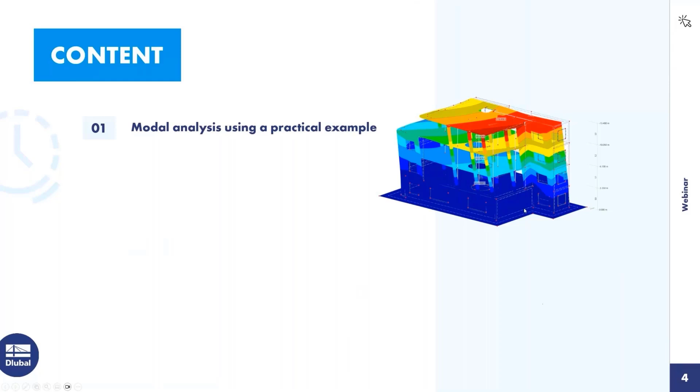To the agenda today. Thomas will at first do a modal analysis on that example here on the right side. In the next step, he will do a seismic design. He will use the results for the design of structural components. And he will also use the add-on Building Model to display story drift, masses per story, and forces in shear walls.

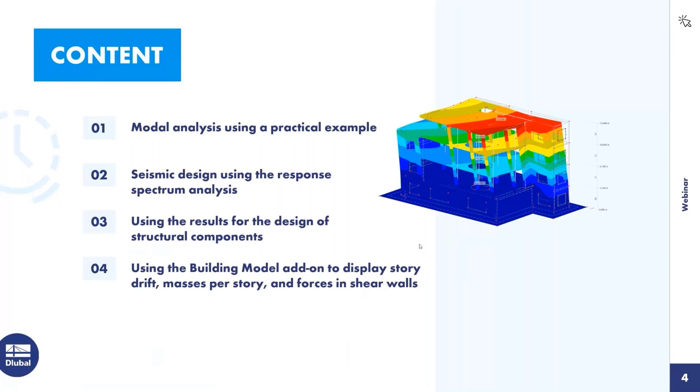And now we can just start with the program RFEM 6. I'm going to guide you through the seismic design according to Eurocode 8. You can see the already modeled building right here, as well as its loading. For the seismic design in general, the most practical approach would be to carry out the ultimate limit state without the consideration of earthquake forces first, like we imagine we've done this already for this building. That means we have our model completed already, and we also have our loadings on that system. That helps a lot since the response spectrum analysis and the used modal analysis both depend on masses, and those masses are dependent on all the structure and all the surface loads, or in general all the loads in the system.

The other alternative, which is also doable with RFEM 6, but I think not that often used, and you could bring more mistakes into the game, is if you just take the earthquake design with you from the beginning. So you would create your modal analysis from the start and pick a load case and so on. But that means you would have to reopen those dialogs more often. Faster would be to first model the structure and load the structure, and then start with the earthquake design. And that's what we're going to do here.

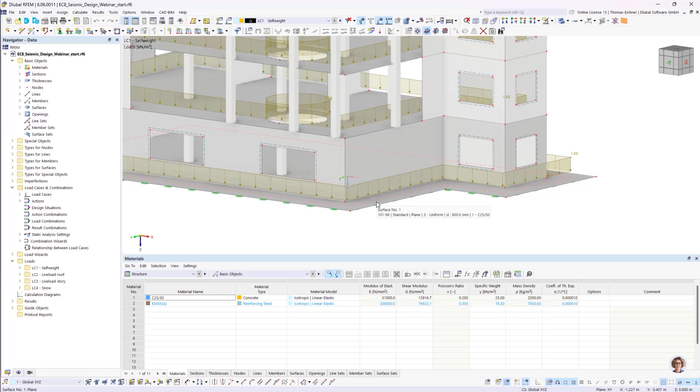We have our building already. We have a reinforced concrete 4-story building for industrial uses. We can see several walls which are always kind of needed for earthquake forces, at least for higher ones. They always help. We have some columns and we have slabs on each level. Let's go into one slab, for example, where I have a thickness of 24 centimeters. Also, we have a C25/30 for all parts of the system. We also have a ground plate right here of 80 centimeters. And this ground plate is also completely supported. That's going to be an important part later on.

So let's go over the loadings next. We do have the self-weight with additional self-weight defined. You can see the additional self-weight right here with 1.0 kilonewton per square meter on the roof floor and 1.5 on each other floor. The loads on the base plate are just simplified, the same as on each normal level. Also in the self-weight, we have the structural self-weight included, which can be activated in the load case. So that's about our permanent loads.

Then we can go to our live load at the roof. There we have 4 kilonewtons per square meter on the top level. And we have our category A for the German Eurocode with 2 kilonewtons per square meter on the other floors. And last but not least, we also have some snow loads, almost negligible, but we have them also included with 0.81 kilonewtons per square meter.

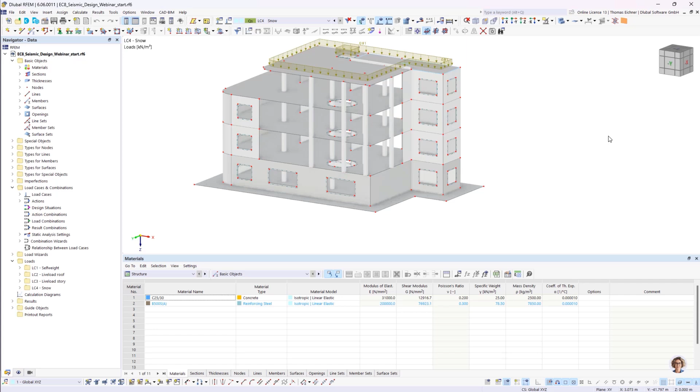We didn't define any wind loads since today we will only investigate horizontal excitation due to earthquake and the seismic design. So now that we went through all our loading and all our system, we can go on and start the dynamic analysis.

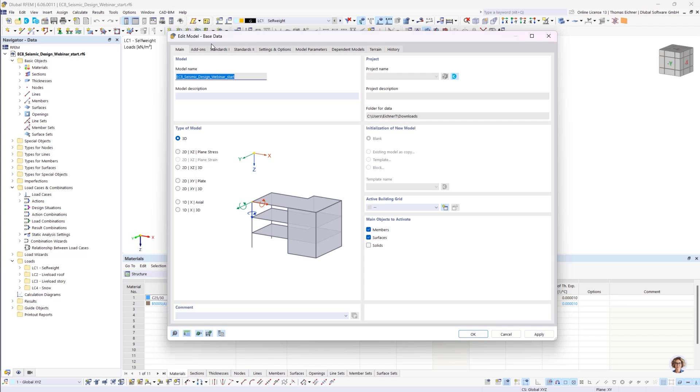Therefore, we need to know RFEM 6. It has a base program where you can model your structure and apply the loading. Then we have several add-ons for those special analyses. And then we're gonna go here in this base data. This always also appears if you create a new model. So in this base data, we can go for the add-ons.

And just as a hint, for me, it's best when I'm doing an earthquake design, I would just activate here our modal analysis, our response spectrum analysis, our building model, and the corresponding design add-on, in this case, the concrete add-on. For our step-by-step show today, we will also apply those add-ons step by step.

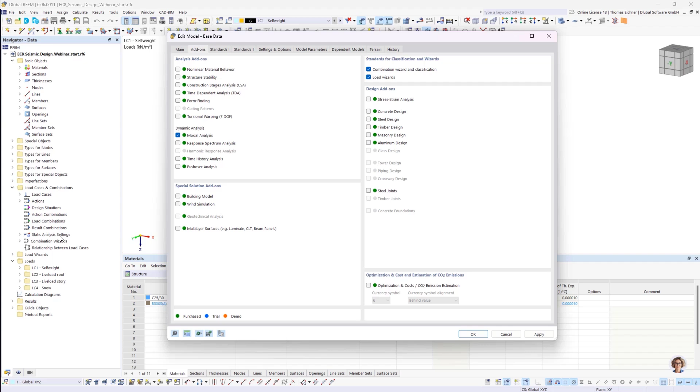So let's start with the modal analysis. And one special thing about the modal analysis is that it's standard independent. Means we don't have to care about our standard here for the modal analysis itself. So we can just apply the modal analysis, and then we will see on this left-hand side that there is gonna be something added. We press OK, and there it is, the modal analysis settings. So we activated that add-on, and all the settings were included in our RFEM graphical user interface.

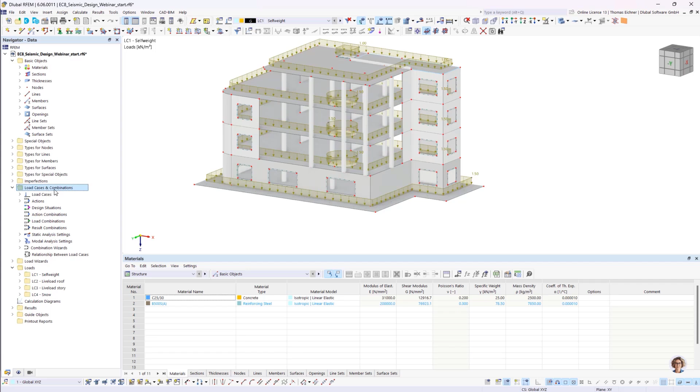And with this, these modal analysis settings are under load cases and combinations. Means I can go in here for the load cases and there we can initialize our modal analysis. Means creating a new load case of type modal analysis and then looking through all the options here.

So let's start right away with our import masses only from load case or load combination. So within dynamic analysis, we also have the mass matrix in our system, in our calculation. Means we need to know what masses will appear in this mass matrix. And for the base knowledge of this matrix, we need to know a load case or a load combination, which we define here. And all the stuff inside this load case or load combination is then used for the masses in the modal analysis.

We're gonna go for the combination while doing the response spectrum analysis in quite a bit. But right now I just want to go for the standard modal analysis. So here another thing, we can go into this modal analysis settings and there are some further options. First, let's go on the eigenvalue method and how many eigenvalues should be calculated. Here we can define either the user-defined method, so we just prescribe the number of modes that need to be calculated, or we have more automatic approaches here.

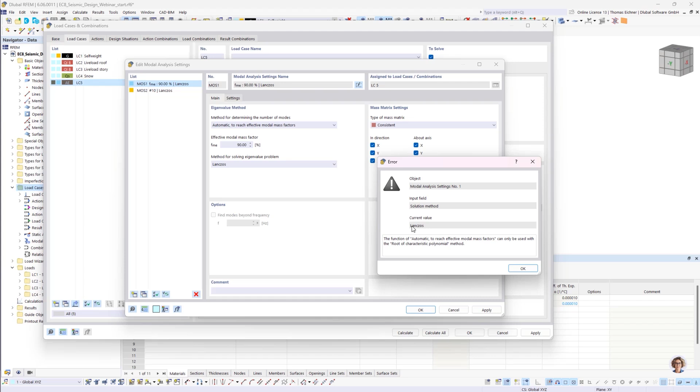This is freshly new. For example, this automatic to reach the effective modal mass factors. And with this option, you can define what effective modal mass you want to reach. And then it automatically calculates enough eigenforms to reach this modal mass factor. Maybe just one hint on this automatic algorithm. The Lanczos solver cannot solve it that way. For this problem, we would need to take the root of the characteristic polynomial. But no worries, even if you picked the wrong one here, there will be a hint before you close this dialog.

And also we have this automatic to find the maximum natural frequency. And that's kind of self-explanatory, so we can switch again. For this first example, we're gonna go with this user-defined method, and we're gonna pick out 4 eigenforms with the Lanczos solver.

The next thing is the mass matrix. So in this previous dialog, we selected which load case or load combination is used as the base for this mass matrix. But here we can also define if a mass matrix should have entries in each degree of mass freedom, kind of. So for today's example, I want to investigate earthquakes in X and Y direction. Means I won't care about the mass entries in Z direction. I will care about the mass entries in X and in Y direction. I will keep the Z rotation though, because you never know if there could be some torsional modes as well. And the next point would be the type of the matrix.

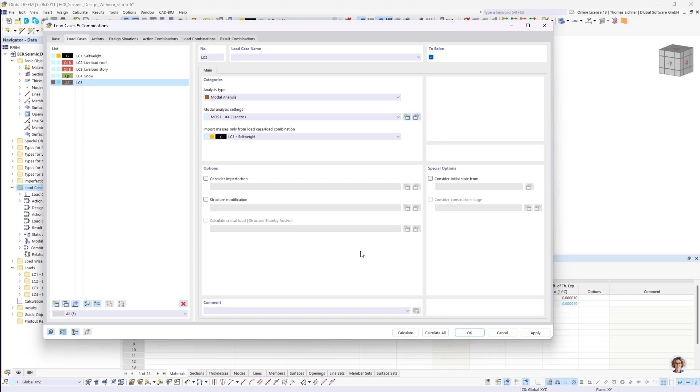Okay, so now we have our modal analysis, we have everything set to go, and then we can go and calculate our modal analysis. So we have some load transfer surfaces, and the model means it always has to redistribute our surface loads at first, and then it's just gonna start with our modal analysis, and it was quite fast. It was, I think, done in 10 seconds for four modes. That's okay. And now we're ready to go and just look at our first mode.

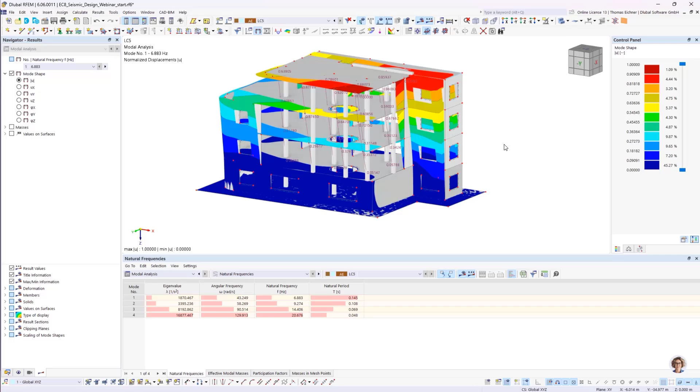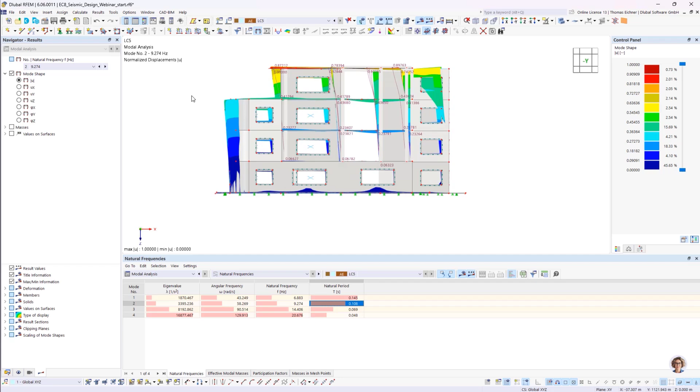So let's see, we have here a displacement in the y direction. So I would say this is a dominant mode in the y direction. So I would assume the next mode to be dominant in the x direction. And so we see we have here the displacement in the x direction.

And the next ones, let's see, that looks like a torsional mode right here. So we have it here about the z-axis. So let's see, that's about the natural frequencies. We can also go into our effective modal masses.

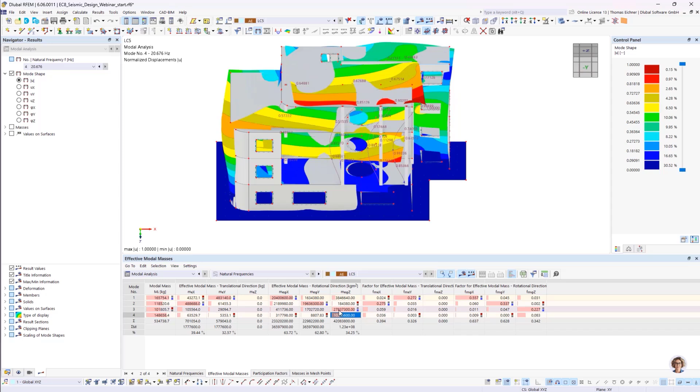And there we go. We see here for the x direction, that was the second one. The y direction, it was the first one. We just have 40% of the mass participation in those directions. That's not enough, so we will go for that in a bit. Then I wanted to show this third one, and we can see this mass for about the z-axis is very high.

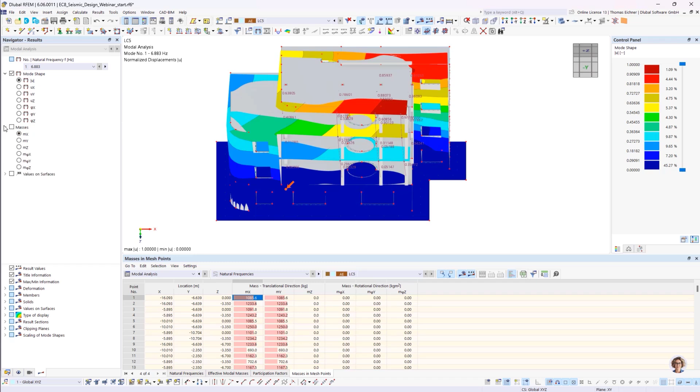That's why I know that's a torsional mode about the z-axis. So further, you can also see our participation factors on this next tab, as well as have the masses in the tables here. But new with RFEM 6, we also have the masses in the graphs. So we have it defined in the x direction and y direction, and now we deactivate the z direction, so we won't have any masses in the z direction.

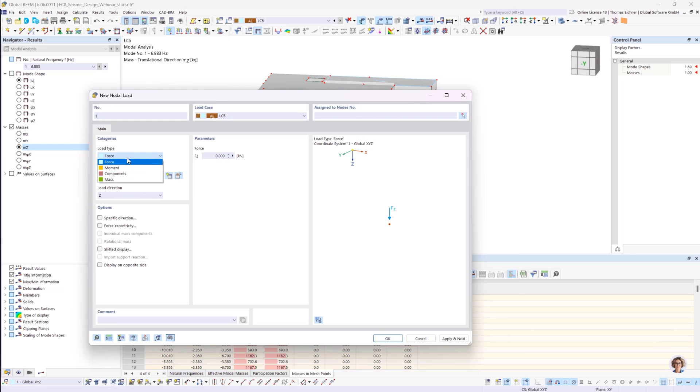Okay, just maybe one last hint for the modal analysis. You have inserted here import masses only from load case and combination. What would also be possible is to use additional mass, meaning in every load window, for nodal loads, member loads and so on, we can select the load type mass and insert a mass here and apply it to some node. For example, this one - I applied it directly in our modal analysis, so it can be added there as well. And now we see them also with this bubble around.

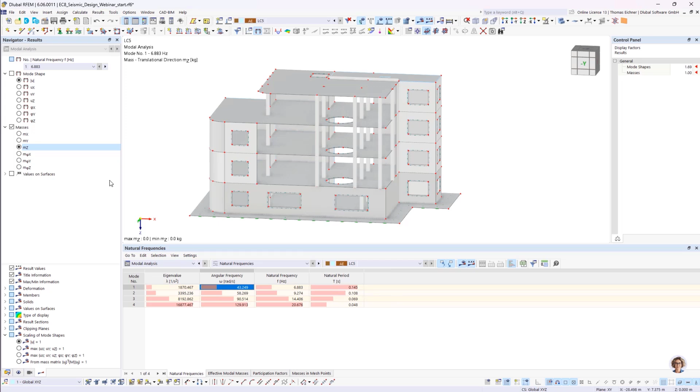Okay, so that's already all for the modal analysis. Maybe one last point on it, and that's the scaling of the mode shapes. So when we go for the first mode, and let's look at the deformation, we can see here we have a scaling where the maximum absolute value of the deformation should be 1. And that's right here - that's the best scaling method for visualization and quick understanding.

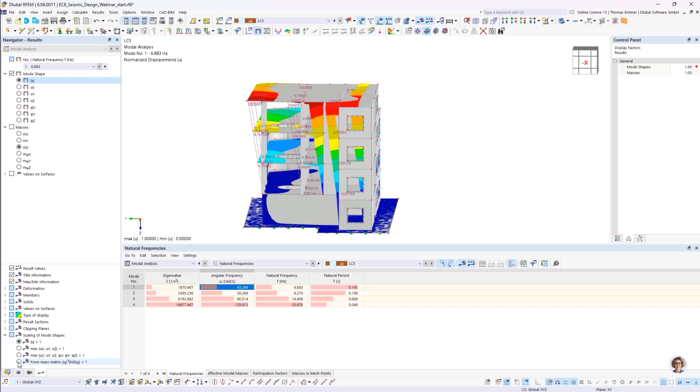But if you want to get behind the theory, you would look at this last one, and this one is from the mass matrix, meaning the deformations are also scaled on the mass of the system. You see here a lot of smaller values than 1 - we have 0.0025 approximately. And those values are used within the response spectrum analysis. Just as a hint, that's how you can find those values.

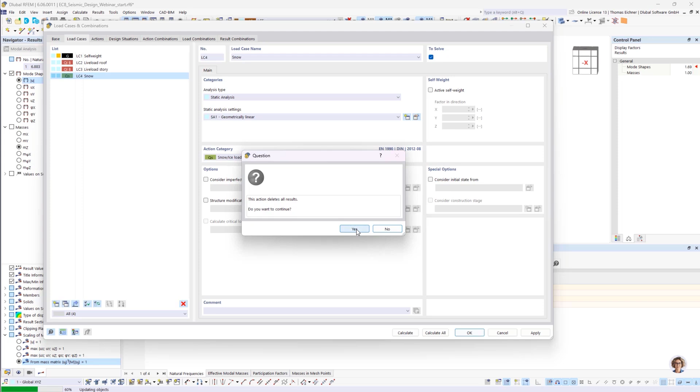So in the next step, we're done with the modal analysis. I'm going to just delete it out since now we're going to go for our response spectrum analysis, and I want to do it all at once right now. So we're gonna delete the results and go into our add-ons. And inside the add-ons, we are gonna add our response spectrum analysis, and additionally I'm gonna add our concrete design module.

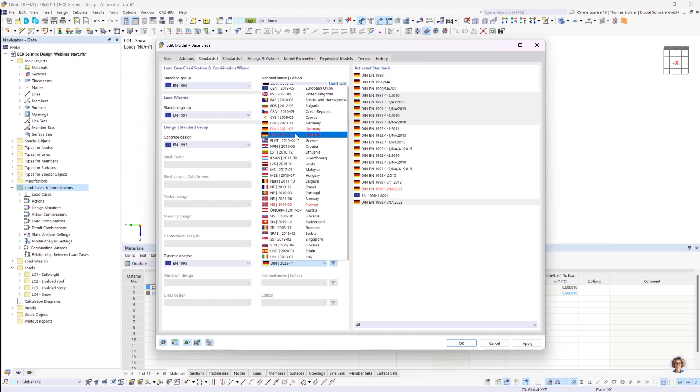So with these two add-ons added, we should now take care of the used standards. For this project, it's already preset, so here on the bottom one we find the dynamic analysis, and we already have our German national annex. If you need any older add-ons, you could press this filter button, and then you would see also the older standards implemented. Anyway, we will stick with our 2023-11 code and just use it for our analysis.

So let's confirm it with OK. And then we also see we have here the static, this modal analysis settings from the modal analysis add-on. We have here now spectral analysis settings from this response spectrum analysis add-on. And we also have added our dynamic loads, which include some response spectra or accelerograms. So we made the response spectra and our library of accelerograms available by just clicking this add-on.

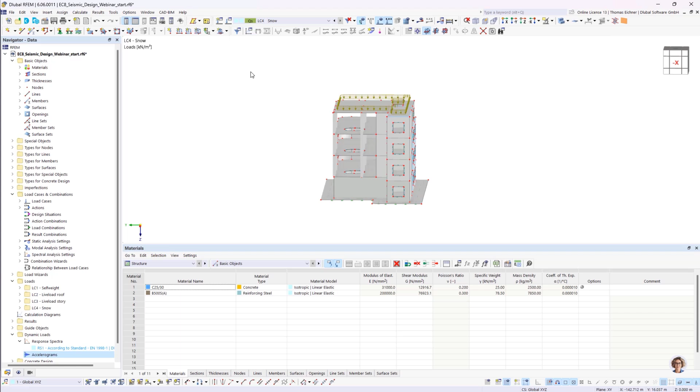On the next step, we would go here, and now I will go over everything needed. So for the modal analysis, we need some base masses, which are used in the modal analysis. And in the different standards, they are defined how to combine our forces of the stories to get those masses. With that said, we can choose here our classification and combination wizard. Also, I will activate here our sub-results, since I want to show you the results of each mode later on.

And then we can go for our load cases directly. We can see here load case 1, 2, 3, 4, and depending on the standard, there's...

Some additional options for the mass combinations. We have here in both cases this class B - I meant office areas, they're category B. So they're both category B, but one is the roof load and the other is the story load, and for masses that can make a difference.

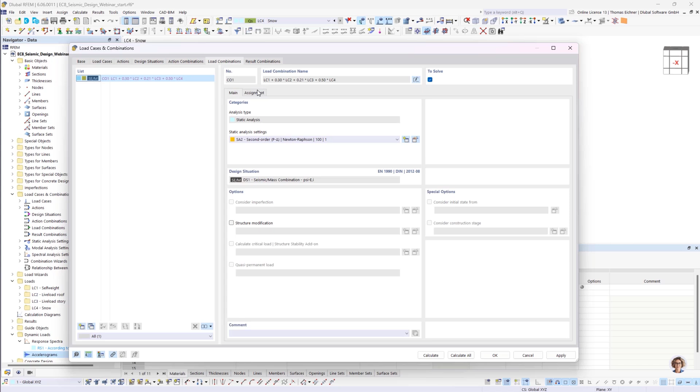And then we can see it just appeared. We didn't have to take any look in any standard for those combination factors whatsoever. We just have our finished seismic mass combination right here, and we can also see every factor if we want to see them. So it's done already, and we can go back into our load cases.

The next step is to use the modal analysis. It means I'm going to create this new load case of type modal analysis. And now for import masses, we will take our just-created load combination right here. And that's the way to go.

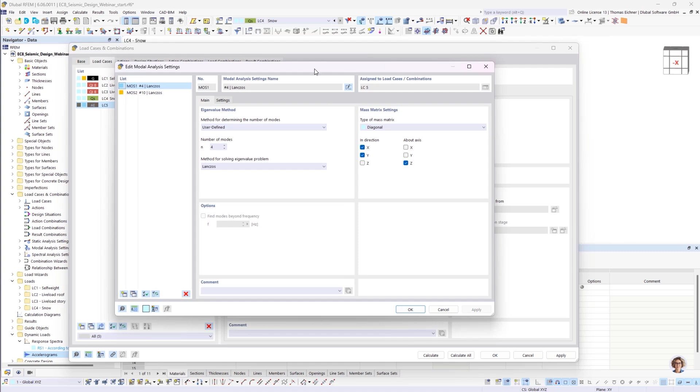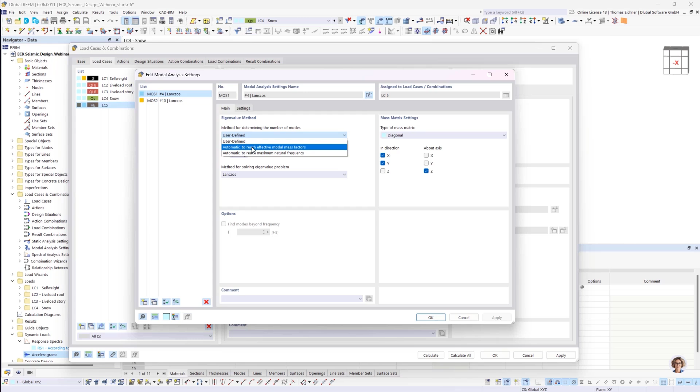And in the next step, we can think about our modes. Earlier in the program, we needed to think through it ourselves and adjust this mode number - maybe it wasn't enough afterwards, and we had to iteratively adjust this number of modes. For today, we will just use this very big help, this automatic reaching of the effective modal mass factors.

We're gonna pick this 90%, and we're gonna set the solver method to the root of the characteristic polynomial. This is done. We also use our diagonal mass matrix, since I think that will be enough for this model. So we're done here and can go on for the settings.

And this one can stay the same. I'm gonna include every Z component of loads. Anyways, I have only Z loads in the program anyways, so it wouldn't really change anything to select something differently here. But now this one is really important.

We have a base plate in our system, and this base plate is 800 millimeters thick. Our other floors were 24 centimeters thick. This means the base plate has an enormous contribution to our mass of the system.

But now we have the problem that this base plate is completely supported. From my modal analysis understanding, if something is supported completely, then there won't be any mode that would activate those masses. So it would become impossible to reach those 90%. And that's where I'm gonna use this mass neglection for the base plate.

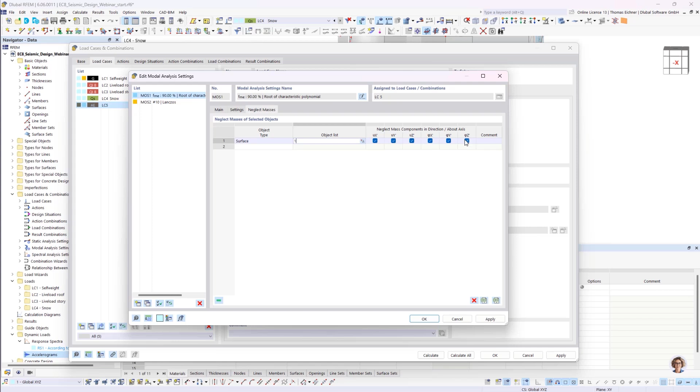And we will go for okay. We're gonna name it modal analysis, and then we are ready to go. We could also use now the initial state out of this seismic mass combination if we would want to consider some simplified p-delta effects, but like I said, we don't need it in this case, so gonna just leave it out here and create a new load case.

And that's how we did the modal analysis. We looked over the modal analysis before as well, but now is the new part. We have here now, with the activation of the response spectrum add-on, also the response spectrum analysis type in our load case. I will call it just in short RSA. There it is, and now we can go over everything inside it.

First, we would have the option to consider accidental torsion as well. We can go for this 5% approach from the standard.

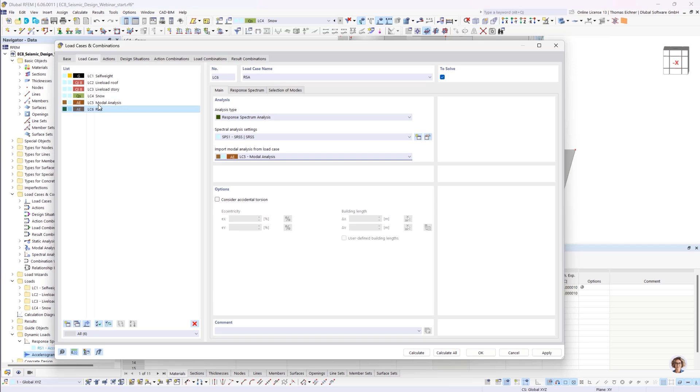Then we have our spectral analysis settings. Maybe first we import one modal analysis. In our case, it's quite easy. We just have one modal analysis. But if you would want to, you could even use more load cases for different modal analysis as well as different response spectrum analysis and compare them against each other.

And you could also modify each with structure modifications. So you could work in one model and just compare something against each other. Let's say it this way. So now we are here in this spectral analysis, and we can also look at our spectral analysis settings. And there it is. It's mainly about our combinations and how results are saved and so on.

So at first, we're gonna use the X and the Y direction. And for each direction, let's say we have a mode, and for each mode, we have a bit of mass contribution to one direction. So what we need to do is for each direction, for example the X direction, we need to combine each mode with each other. Now, the thing is with those modes, they could be in a different direction. They could strike each other out in some places.

And that's where we need to do quadratic combinations. With this one, we have the SRSS rule, which means all the results of each mode are squared. Then they are all added together. And after that, the root is drawn for this complete result. And that's what we get here.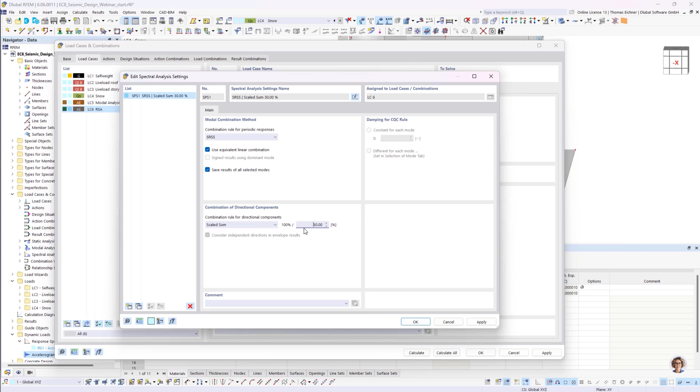But we also have in the Eurocode 8 something that's called the scaled sum combination. And there we can define, per default as mentioned in the Eurocode, 100% in one direction and 30% in the other direction. That's something we can use here as well. And if you have a special project, it could be useful to change it to 40% or something. But that's dependent on the project and on the standard used. So we will go with this scaled sum 100/30 and click OK. So we have this first tab done already.

And we can go for our response spectrum. There we go. We're gonna go for the X and the Y direction. The same response spectrum is already used for both. And now let's see in our options how to get those response spectrums. Let's start with the simple user-defined one. Maybe just as a hint, if you have something from these other options and you switch to user-defined, it will also be switched to a table spectrum, and you can also import and export all those values as you like.

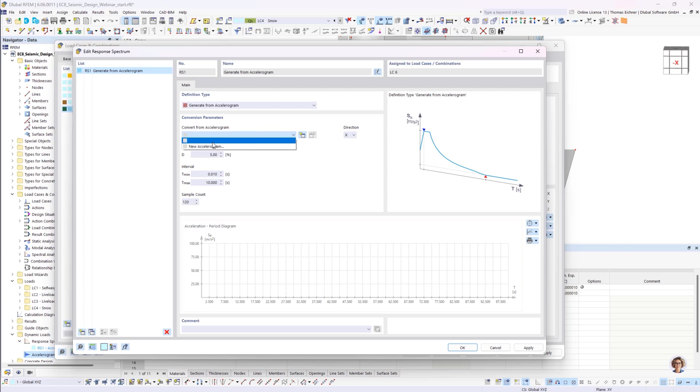So the user-defined is kind of just easy. The same one with the G factor, which just means that the accelerations are inserted in dependency of the G factor. Then the next point would be to generate a response spectrum from accelerograms. We could also choose our damping value here, our direction, and so on. And we could take one from our well-filled library here. Just gonna show you this one.

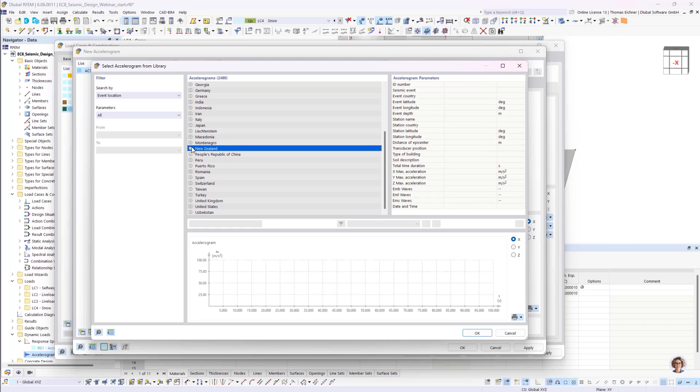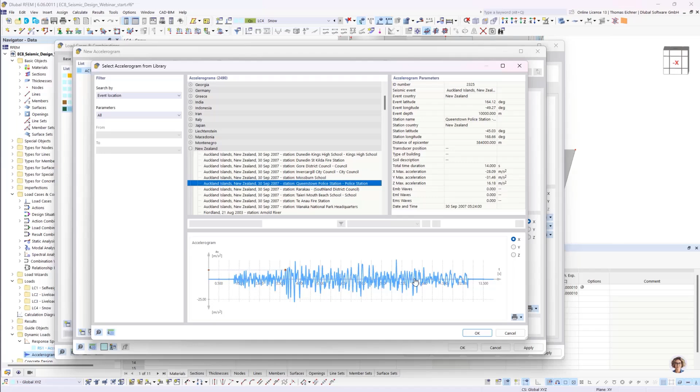Right here, you see lots of different countries. In this case, let's go for, that's just an example of some ground measurements of an earthquake in Auckland Islands in New Zealand. And this information can be used to produce a synthetic response spectrum. So let's go back. We're not gonna use the accelerogram for this project.

What we're gonna do, and that's the most used one, is we're going to use just the response spectrum according to the standard, in this case the Eurocode 8 with the German annex. So yes, we need a design spectrum. We need to pick a behavior factor. We're going to use 1.5. I think it's limited to 1.5 in the German annex.

And then we need to have some more values inserted here. So the 3 values we need here, the rest is automated, are the ground type, the importance class, and our reference peak ground acceleration. For the importance class, it's project dependent. We will pick 2. The Q factor, we set it to 1.5. And then we only need the ground type and the AGR value. And for this, we will go shortly to our web service tool.

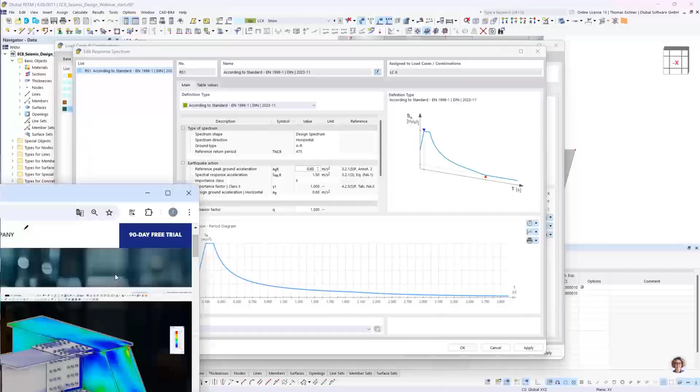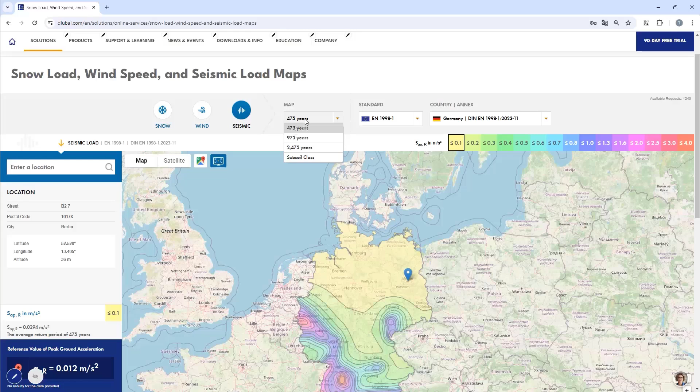So this is the Dlubal homepage. And within this homepage, we can go to our online services, and there the seismic load maps. We directly switch, okay, United Kingdom, that's not what I want. I want to go for the German one and the seismic one. And then we see we have the 475 years return period. So that's what we take here.

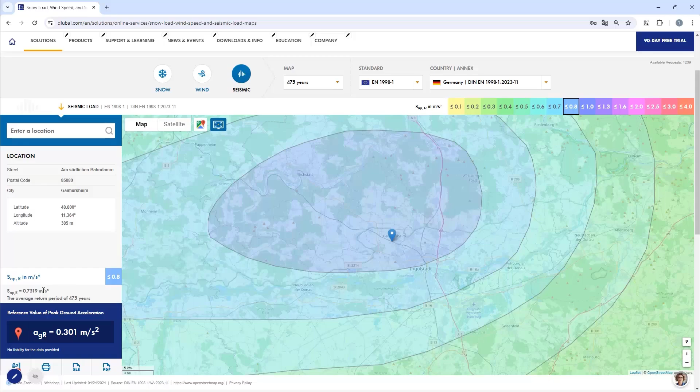And then I did want to go for something in Ingolstadt, but I think, let's see, 0.7. Now I want, let's say, the biggest earthquake in Germany, kind of. So we're just gonna take this one right here. Maybe you can see the map of Germany again. I think here next to Frankfurt, next to Koblenz, we also have an old volcano. That has some relation with this earthquake map, just as side information.

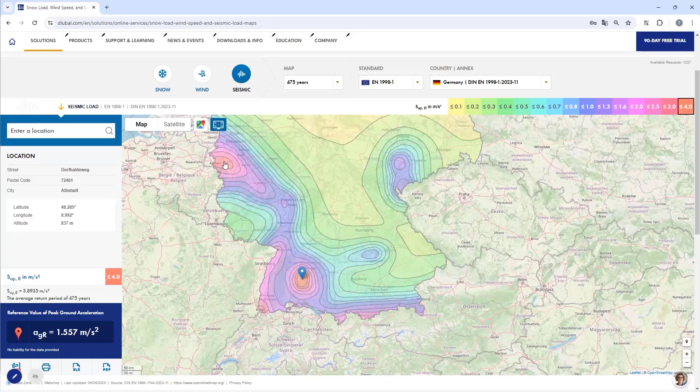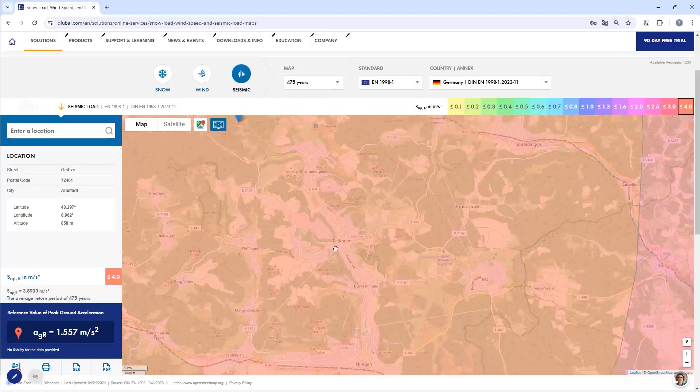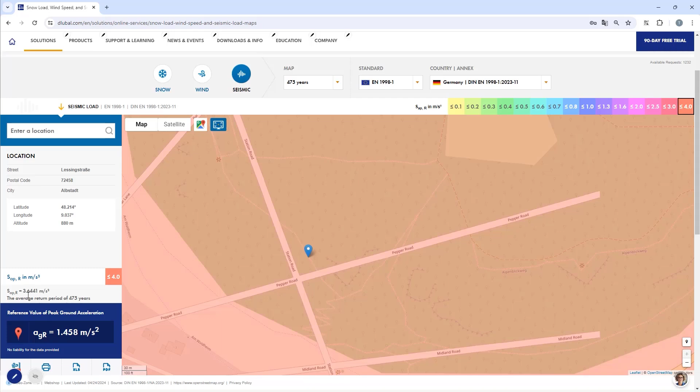But for this one, we will go for the most drastic one, right here. Let's go into Ebingen. There are some sheets. We're gonna create a new one right here. And okay, now it's selected. Now we can take our AGR value, 1.458, back to the program. 1.458.

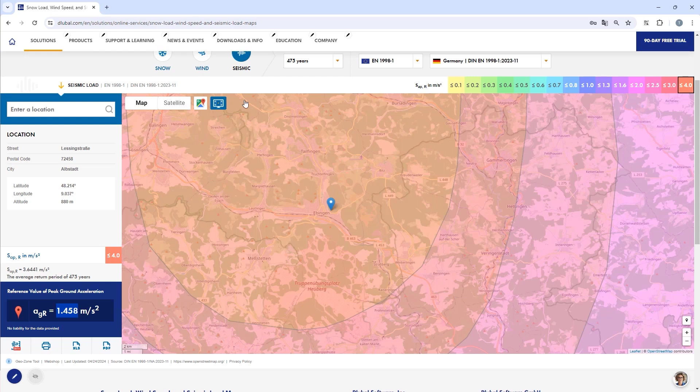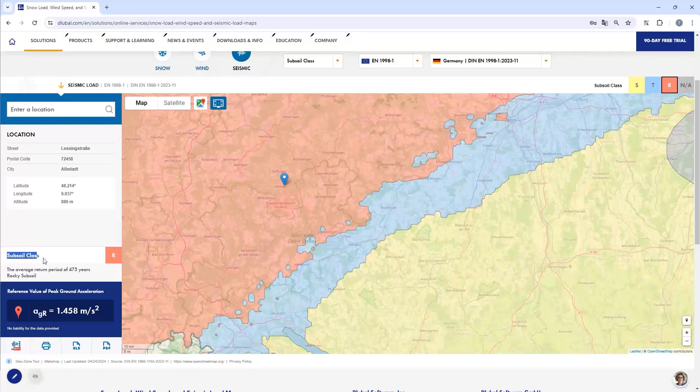And we can also change this one here to the subsoil class, depending on what the standard needs here. But there we see we have a subsoil class of R. Means we can go here for our subsoil class. R is already picked. The A, B, and C is dependent on the direct ground under the building, so that is gonna be given within the geotechnical report, and we just assume it to be B.

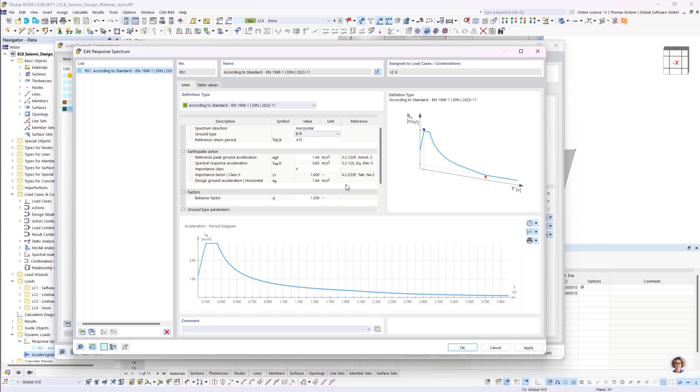So what changes with the subsoil type is mainly those corner points, as well as this multiplication factor of the peak acceleration on top of the response spectrum. Okay, so BR, we are ready to go. We have our spectrum now completely defined. We could also just scale it right here if you want to do that for whatever reason. And the next thing would be to select the modes. Now we could calculate it right here and see everything. But I'm going to just start and calculate all in this case.

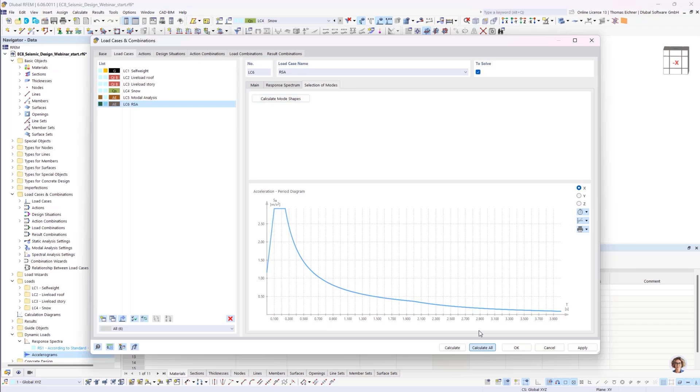And then we're going to see something in a second. Okay, I didn't care about the concrete design yet, so I'm just gonna go over it. And there we see we have now our response spectrum analysis right here, this load case 6, and it is made out of several load cases. And in a second you will see they will be almost done at the same time. It means we have here a new solver mechanic where different load cases can be distributed onto different processor cores. And that's something we're just going to use here.

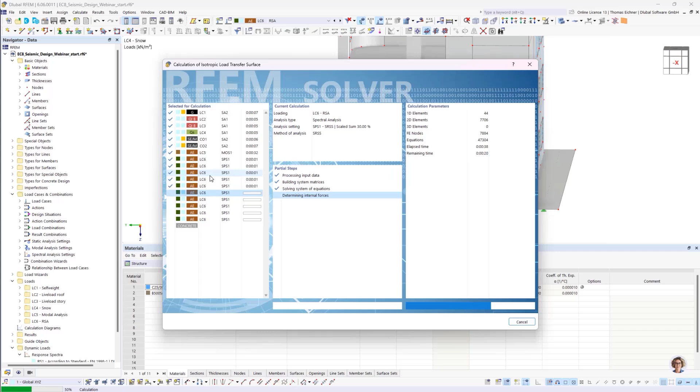And yeah, let's see, I think the model is through in 30 seconds. And also our spectral analysis is through. We can go here. And yeah, we already have the result. Perfect. I'm gonna just go for this one here. Let's go into our spectral analysis, and then we can have, let's see, the overall result first.

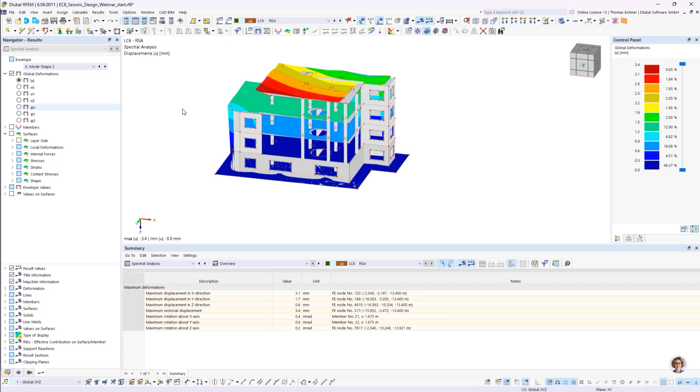And yeah, let's start with this combination and how it worked. So as you can see, we have here in X, in mode shape 1, we have this deformation, as well as for this mode shape 2, we got also this X deformation. So it is nothing else than the mode shape 1 was used, and all the masses were accelerated in X direction. Next step, mode shape 2 was taken, and the masses were accelerated in X direction again.

And now this X total, that's nothing else than the results X mode shape 1 squared plus X mode shape 2 squared, and so on. And in the end, the root is drawn out of the sum of those modes. That's how this X appears here.

For this one, we have the 100/30 rule in both options. So we have one time 100% in X direction plus 30% of the Y direction, and vice versa. And the scaled sums is nothing else than an envelope over those two top results. That means the worst results are just in our scaled sum envelope. And that also means if we have enough mass participation, we just don't need to care about this bottom one anymore. We just use the scaled sums envelope, and the rest we don't really need.

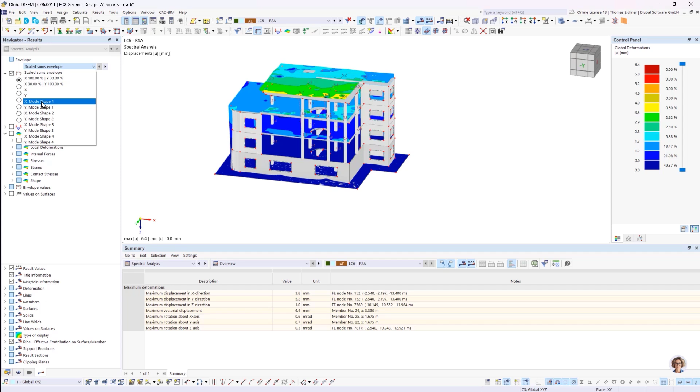So maybe just one hint. You could, of course, use it to understand the modal analysis and the response spectrum analysis. That's the main reason for it. But okay, let's go for the scaled sum envelope. We also have here our results for each member as well as for each surface and node. That's well known in, I think, every static analysis as well. Nothing big changed here.

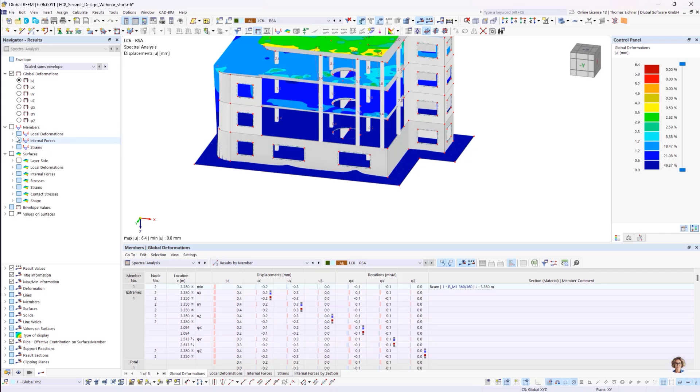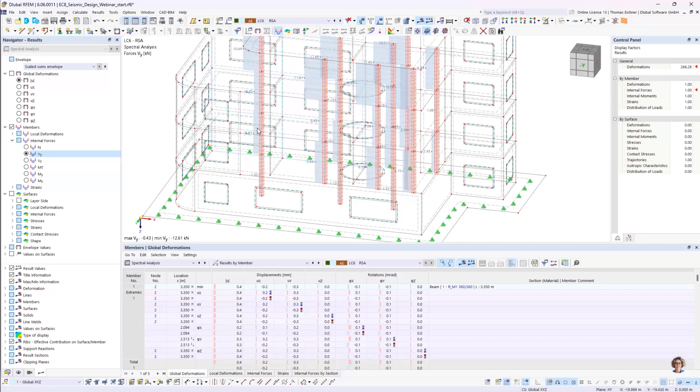Just one more thing. If we go, for example, to the internal forces Vy, and we see right here, let's go for the wire model. Exactly. And we have here our result in this case. Now, our next step would be to use it in the concrete design. But okay, I just found another thing which I wanted to show you.

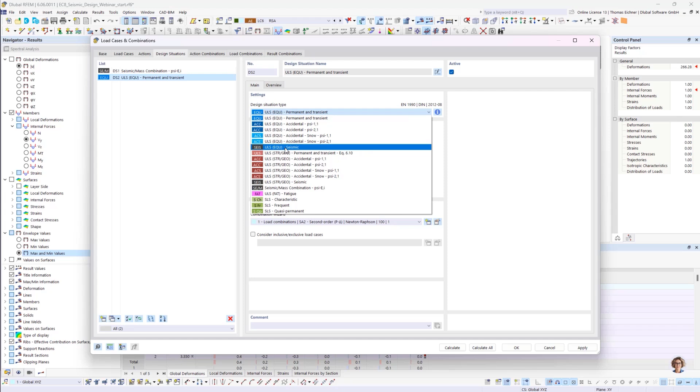We stay at the results for the internal forces, and we have here plus and minus. So that's what I meant with we would lose our signs of the internal forces, but they're both taken into account in the design. So that's quite good. And now we can go for the design. And that's something that was also enhanced with these design situations. We can just create a new design situation of the type, in this case, ultimate limit state seismic. We're also going to say it should be used for the concrete design.

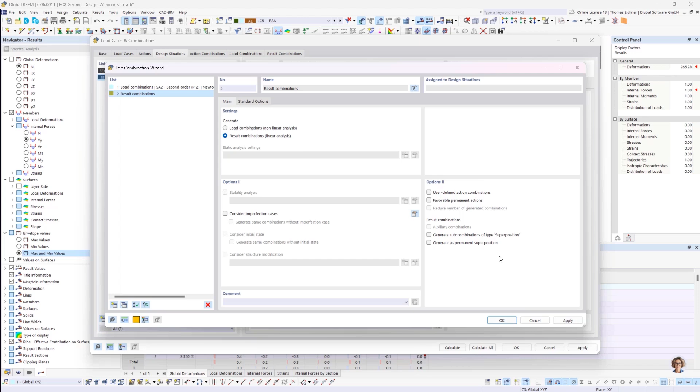And now there's something important. We're going to use the combination wizard again, but we can't use the load combinations wizard because we have an envelope of results and we can only combine them with other results. That means we need to create a new combination wizard here and just set it to result combinations. We can ignore the rest and go with OK. Then we also activate it for the concrete design and select this result combination wizard here.

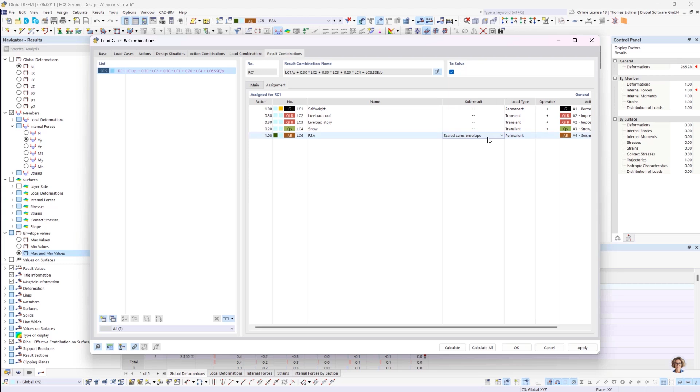And then it's done. And now we can go into our result combinations and we see our result combination is created right here. We can go for this assignment and we can see now we have all our loads included as well as our scaled sum envelope result of the response spectrum analysis. We could change it here, even though in my opinion that doesn't really make practical sense. It's more for testing reasons. So we're going to stick with the scaled sums envelope and that's done. We have the result combination here already. We can click OK.

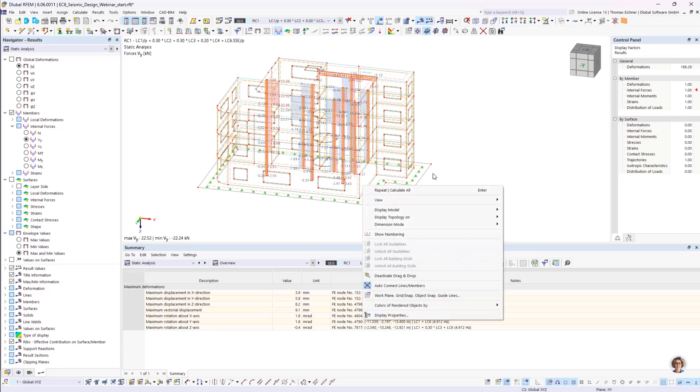And yeah, then I would say we can just calculate everything again. So let's see. Okay. Now I think it was about 30 seconds here and about 1 or 2 seconds in the modes. There it goes. So the concrete design. I think there should be a warning again, but let's see. Oh, it worked out. And now we can go just for the concrete design.

Let's see what I did there. I should have gone with the input data. Exactly, we have here the objects to design, just everything. Okay, it's a bit more than I wanted, but we can just go for only the results I wanted anyway.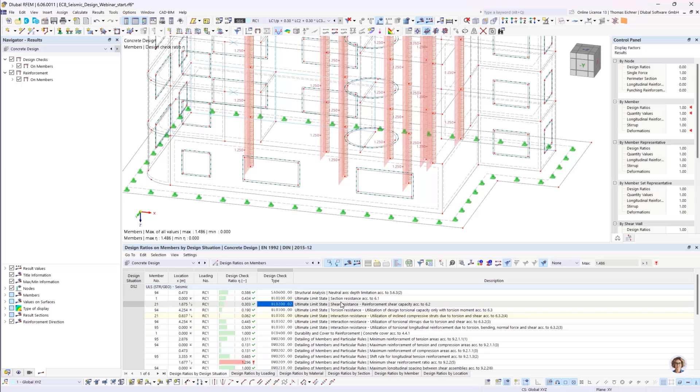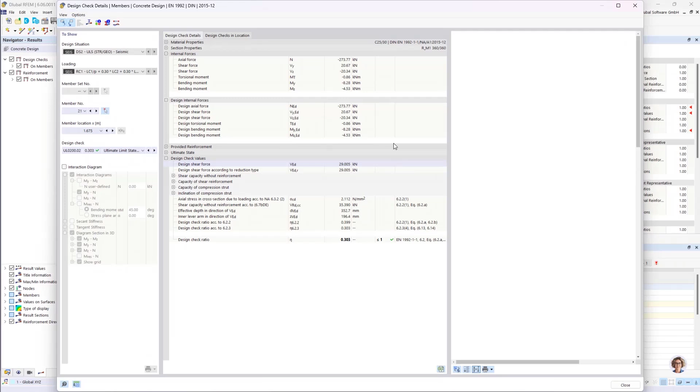Let's go here. We're going to take, for example, this member, and we will have, in this case, the shear resistance on this top side. So what is used in this concrete add-on is also shown here. We have the result combination 1 in this case, which is our earthquake combination. It delivers a 30% ratio, and we can also investigate the whole design check right here as in every other add-on as well.

And we can also check the internal forces here for the design check and everything that's needed. So that's done here already. And since we are running a bit short of time, that's all for it here.

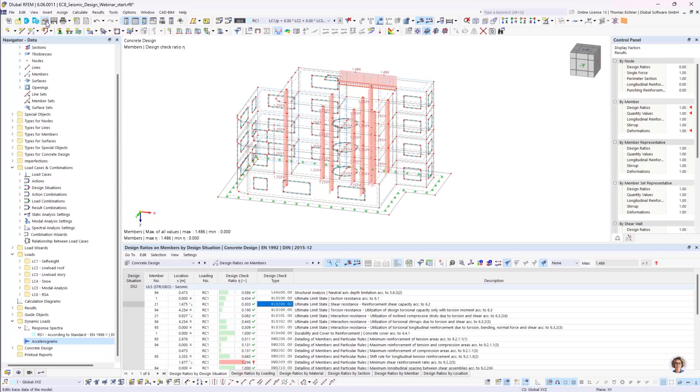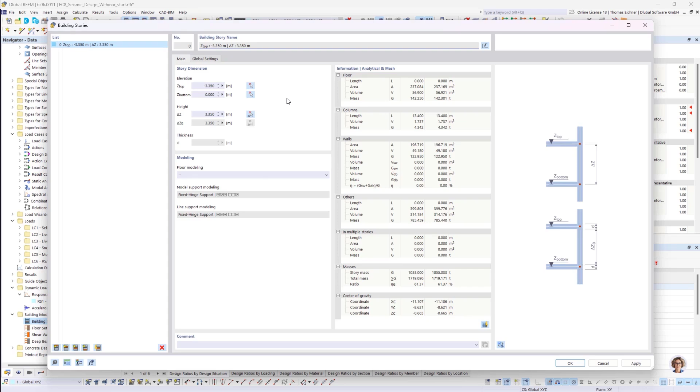Maybe just one more thing I wanted to show you, and that's in our base data in the add-ons, our building model. We're gonna activate it, and then it's gonna be in our data navigator right here on the left side. We're gonna pick our building model, and it's really simple to use. We can just go here. In my case, I do know that we have an elevation of 3.35 meters here, and the elevation is the same for each story. So for this simple case, I can just go 3 times on this new story button,

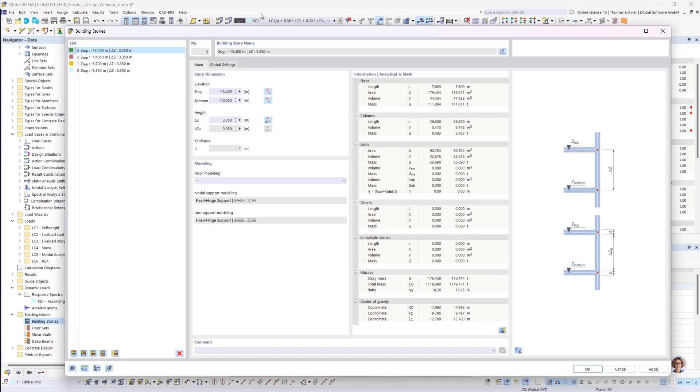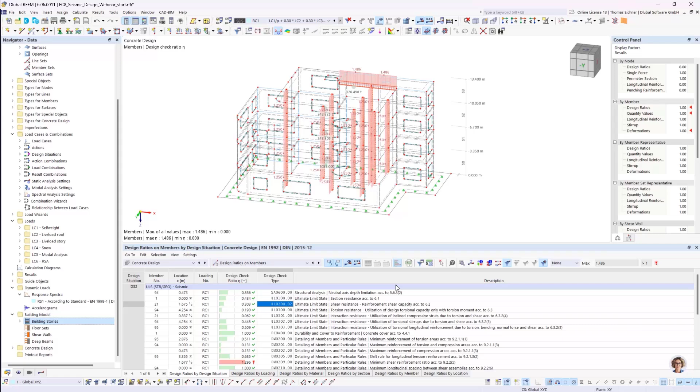and it's done. One more thing, we could change here our floor modeling to rigid diaphragm, load transfer only, and soon to come semi-rigid diaphragms. But for today, we will just leave it as it is. And yeah, it's done already, and that's it. So we just got our results in here. And now we will go into, let's say, static analysis, for example.

We can go into our self-weight load case, and there we have now our results by stories. This holds also for our spectral analysis. The same here. We can go for the spectral analysis and also look at our results by stories. Means we have our location of our resultant of the forces. We also have interstory drifts for some serviceability checks. We have centers of mass and rigidity.

And we have the sensitivity coefficient, which is used sometimes, or let's say it is defined in the Eurocode 8 and neglected in the German annex, but nevertheless, you can use this one to find out if your system needs to include P-delta effects or not. Okay, so that's it for this one.

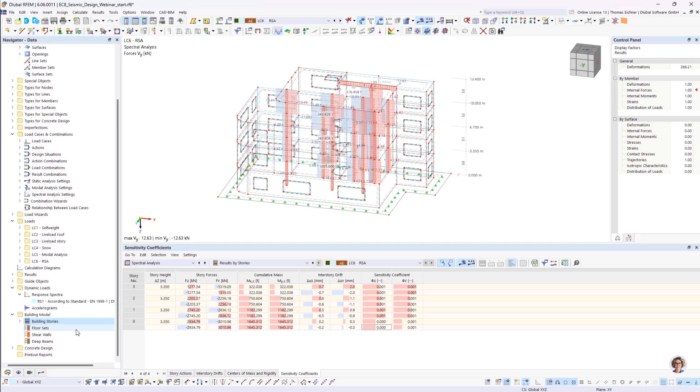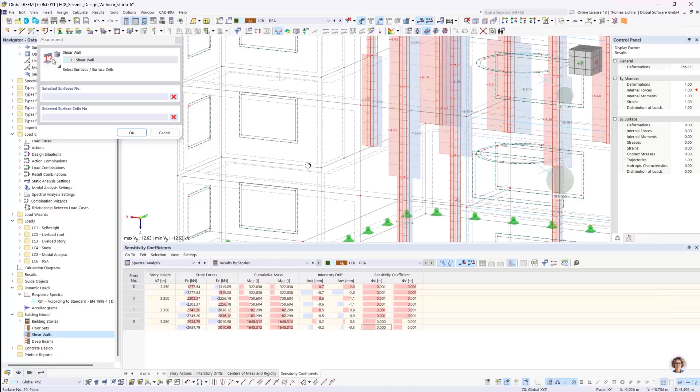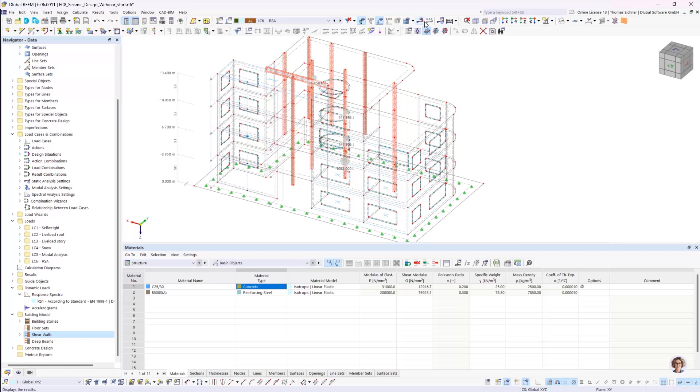Maybe one last thing which also could be used is we also have shear walls. Let's pick one example. I'm gonna pick this one as an example shear wall here. The shear walls would need to be defined in this case. So I'm gonna go here and just go for this whole wall from the bottom to the top. We will also generate a result section. And we need to calculate it one more time. Now it's done, and we can just go for it and calculate it.

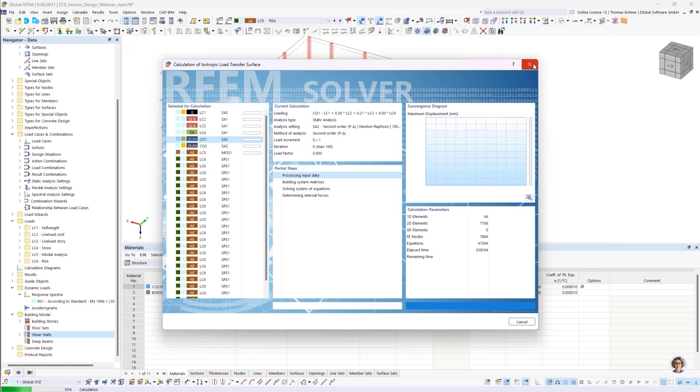And maybe in the meanwhile, also the printout report. Within the printout report, you could include either the modal analysis results, so the modal participation factors or the eigenfrequencies, but most likely you would just include the response spectrum analysis results, because there also the used natural frequencies are given.

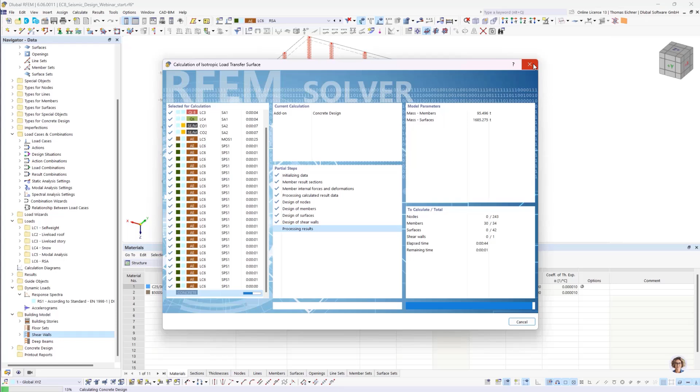And you can also put out every result we just saw in the tables. No, there's nothing new to the usage of the printout report. You can just put in whatever you like from the modal analysis as well as from the response spectrum analysis and the building model.

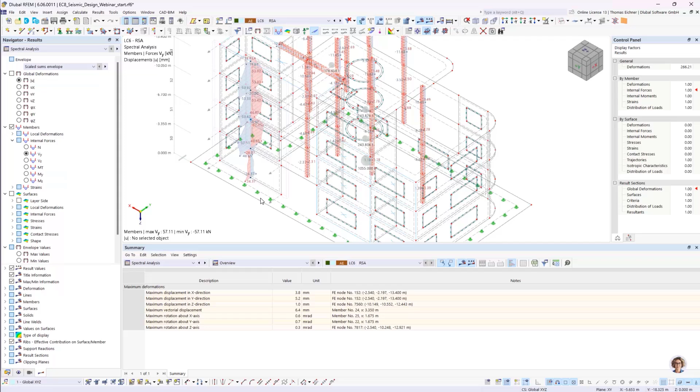So now we're here. And we see we are in the load case number 6. We also see our automatically generated result section of this shear wall, and exactly, we need to go into the results by stories, and there it is. Now we also have our forces in the member shear walls as well as our member forces in shear walls. So the member forces in shear walls is just that this is an imaginary beam of the same dimensions.

So exactly, and yeah, that's how you can investigate the seismic design within RFEM 6, and also go on some detailing with those shear walls and how to get the results by story.